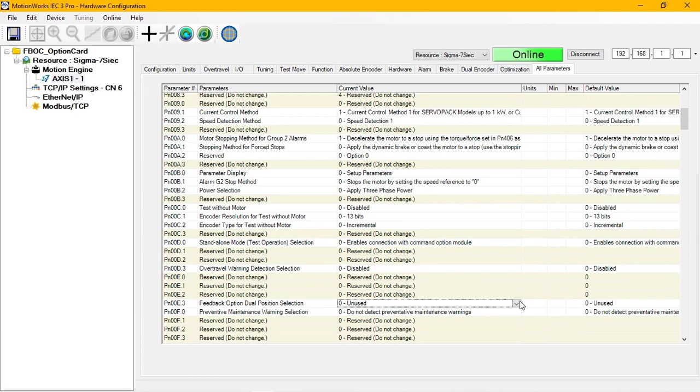Here's a quick preview. The full closed loop and feedback option cards can be added to the Sigma-7Siec for 1.5-axis operation. This operation typically is used for applications that deal with camming and gearing. To enable the external encoder for the 1.5-axis operation, parameter Pn00E.3 needs to be set with the proper rotation direction. When enabled, the external encoder can be used as an electronic gear master. Now let's look at this in a little more detail.

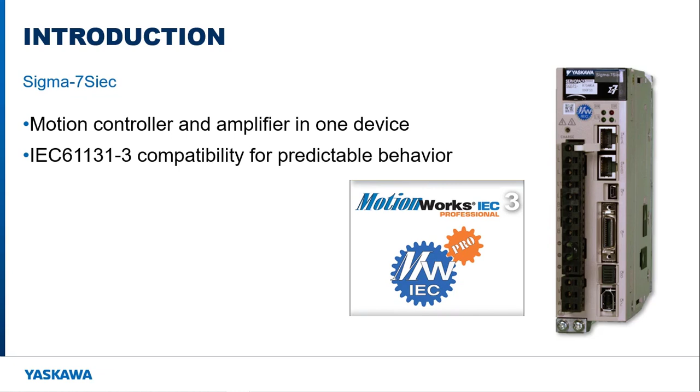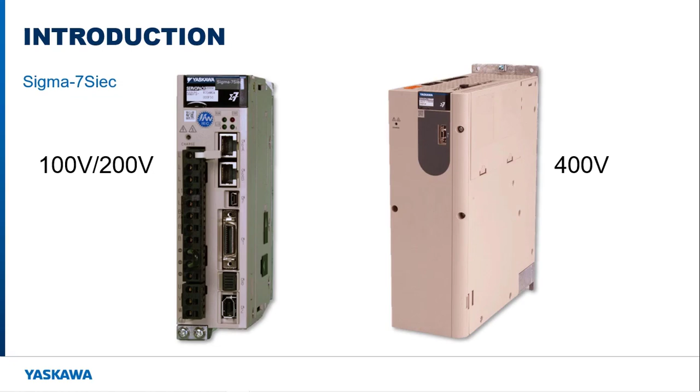Part of the IEC controller lineup is the Sigma-7Siec controller. This Sigma-7Siec controller is a single-axis Sigma-7 amplifier with an embedded controller that allows it to be programmed using MotionWorks IEC. This single-axis controller follows the IEC 61131-3 standard, just like the MP3000 IEC series controllers and the MP2600 IEC 1.5-axis controller. The Sigma-7Siec controller comes in either the 100V/200V style or the 400V style. This single-axis controller has 7 digital inputs and 4 digital outputs available for application use.

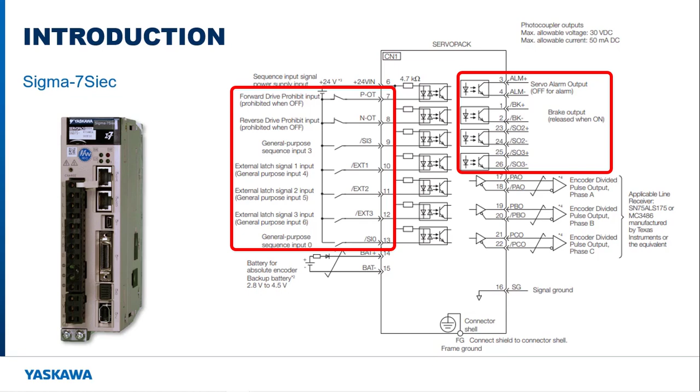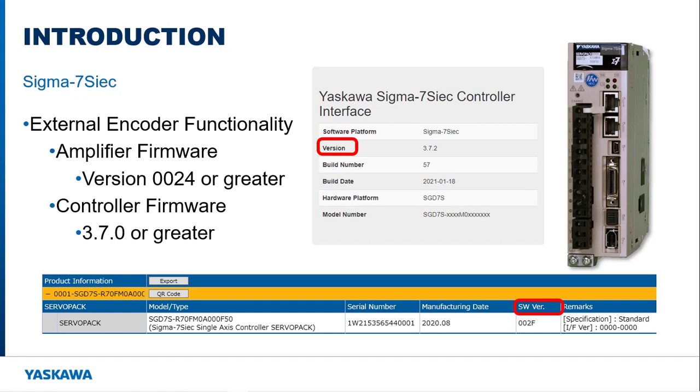Amplifier firmware version 0024 and controller firmware version 3.7.0 adds functionality to the Sigma-7Siec controller. This allows an external encoder to be used to provide 1.5-axis control. 3 option cards are available that can be used for 1.5-axis operation on the Sigma-7Siec controller. The full closed loop option card is one option, and the others are the feedback option cards, which come in 2 variants. These option cards are purchased separate of the Sigma-7Siec, and you as the user install them. They do not come pre-installed from the factory.

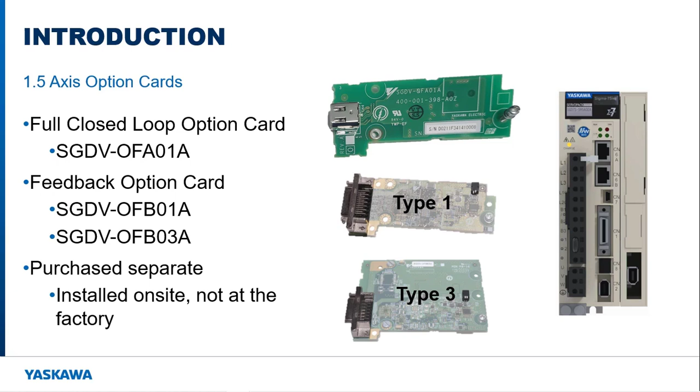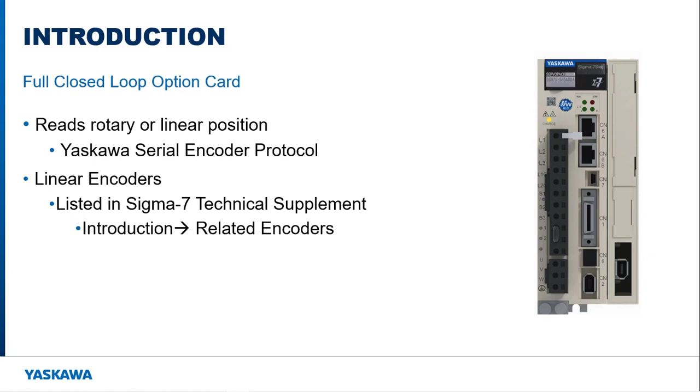Looking at the full closed loop option card, it reads rotary or linear position information from Yaskawa certified encoders. These encoders use the Yaskawa serial protocol to transfer position data. Supported linear encoders can be found in the Sigma-7 technical supplement under the Introduction, Related Encoder section. One rotary encoder is available using the Yaskawa serial communication. The encoder cable used to connect the full closed loop option card with Yaskawa serial encoders can be found in the Sigma-7 technical supplement under the SGMMV and relay encoder cable sections. The option card uses the same encoder connector as the Yaskawa Sigma-7 amplifier.

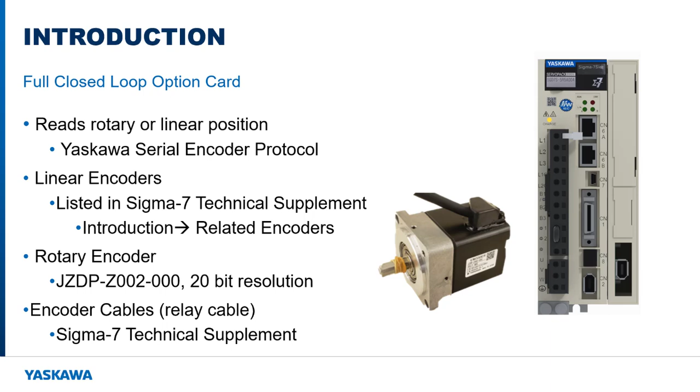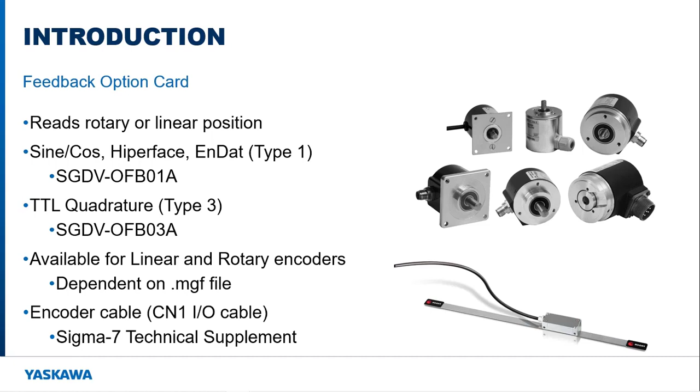The feedback option card is used to read rotary or linear position information from third-party encoders. The Type 1 feedback option card supports the use of sine-cosine, Hiperface, and EnDat encoder protocols. The Type 3 card only supports the use of TTL encoders. To use any third-party encoder with the feedback option card, a manufacturing file needs to be created for that encoder and loaded into the feedback option card. The encoder cable used to connect the feedback option card with the third-party encoder can be found in the Sigma-7 technical supplement under the CN1 I/O peripheral cable section. The feedback option card shares the same connector as the CN1 connector on the amplifier.

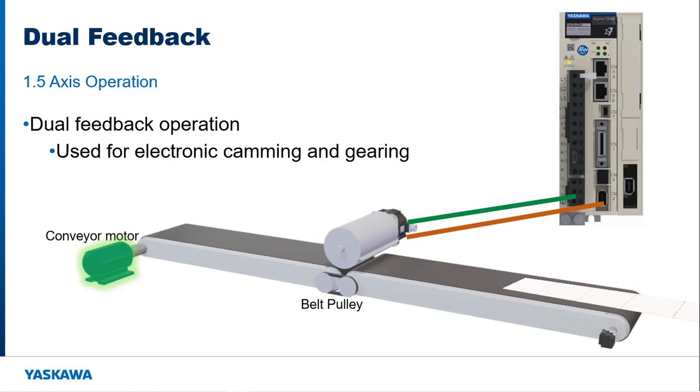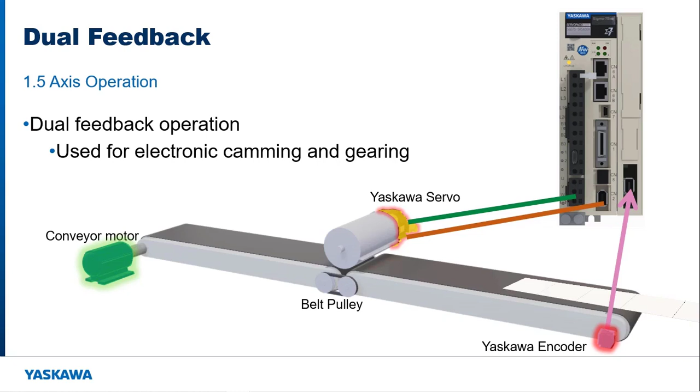The main use of 1.5-axis control is for dual feedback operation. The dual feedback setup uses the external encoder to control the operation of the motor through electronic camming or gearing. Consider the following diagram of a rotary knife mechanism. The conveyor belts are being driven by an induction motor running separately from the Sigma-7Siec controller. The external encoder is the master device, and the Yaskawa servo is the slave device. The external encoder, connected to the Sigma-7Siec via the full closed loop or feedback option cards, reads in the conveyor's position and calculates the speed of the conveyor belt. The servo motor is connected to the rotary knife that is cutting the material riding on the conveyor.

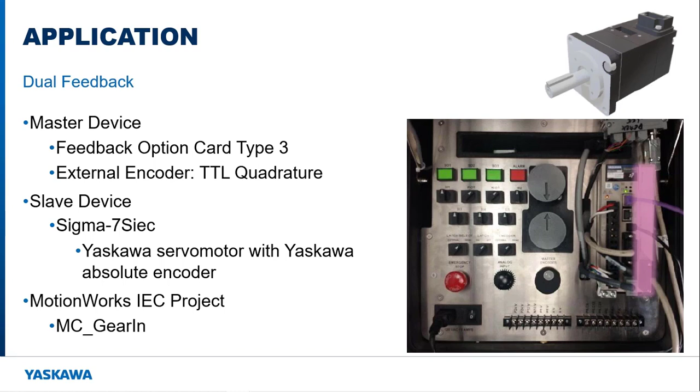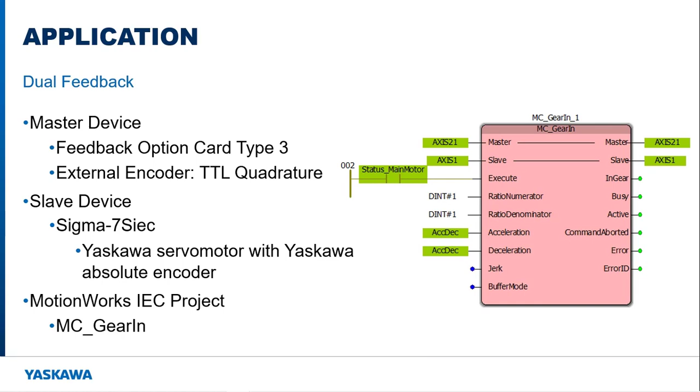I'm going to go through and build a dual feedback application to show how to set up the Sigma-7Siec controller for 1.5-axis operation. For this example, I will be using the Type 3 feedback option card, but the full closed loop and Type 1 feedback option cards can be used in the same way. The master device is going to be a TTL quadrature encoder connected to the Type 3 feedback option card. The slave device will be a Sigma-7 motor connected to the Sigma-7Siec single-axis controller. In the MotionWorks IEC project, the MC_GearIn block will be used to gear the two devices together. The final outcome will show a one-to-one gearing application. One rotation of the master, the external encoder, will equal one rotation of the slave, the servo motor, and both will rotate in the same direction.

These option cards are ordered separately from the Sigma-7Siec controller and need to be installed on the Sigma-7Siec. The option card installation guide is available on Yaskawa's website, along with the product manual for the feedback option card. The general installation guide is also included in the option card box when ordered.

After the option card is installed, the servo pack can be powered up and initial settings can be performed in MotionWorks IEC. I am online in hardware configuration with a new project, and the controller is currently set back to its default configuration. The hardware tree displays the integrated servo axis.

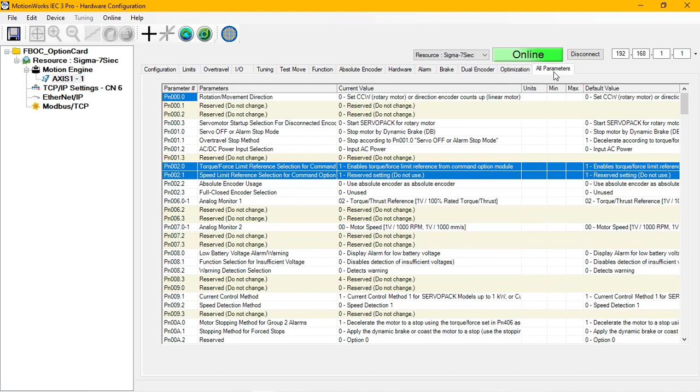To enable the dual feedback external encoder functionality on the feedback option card, I need to go under Axis 1, go to All Parameters, and parameter Pn002.3 needs to be set to either 1 or 3. When turning on the use of the dual feedback encoder, the positive direction needs to be specified for the encoder. For this example, the encoder rotation should be the same as the motor rotation.

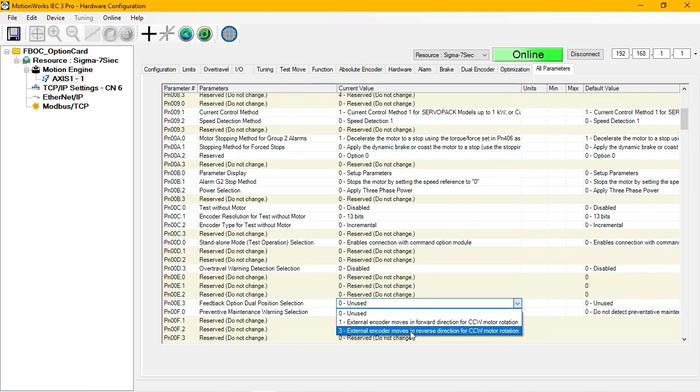If I look at Axis 1 again, and go to parameter Pn000.0, I can see that the motor's rotation is set to counterclockwise for the positive direction. So if I go back to all parameters, through testing I have found that setting 3 gives me the desired result for the encoder rotation. I can now do an online save and reboot.

After reconnecting in hardware config, Axis 21 will now be available in the hardware window. This is the external encoder that is connected to the feedback option card. Looking under the resource, I can see that there is an alarm, and it is an A.CF1 alarm. If the full closed loop option card was used, the alarm would not appear. This alarm is there because there is no manufacturing file in the Type 3 feedback option card. This file needs to be loaded using SigmaWin+ version 7. Loading the manufacturing file can be done after hardware configuration has been set up.

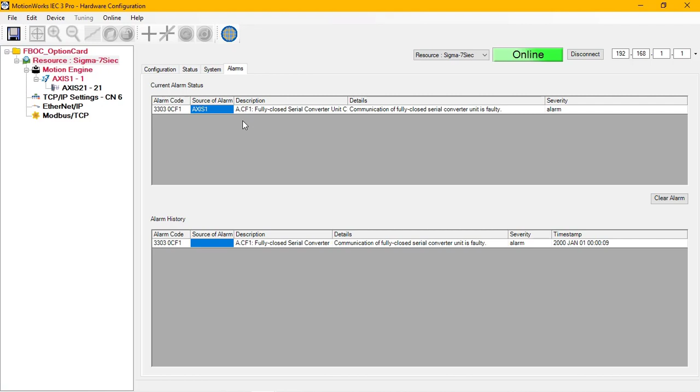Going back to the external encoder axis, the encoder being used is a TTL, otherwise known as an A quad B rotary encoder. The encoder spec sheet shows that the encoder is 13-bit, so the resolution in hardware configuration should be set to 2 to the 13th, which is 8192. The feed constant needs to be set equal to the motor encoder's feed constant so that visually, one rotation of the external encoder will rotate the servo motor one rotation.

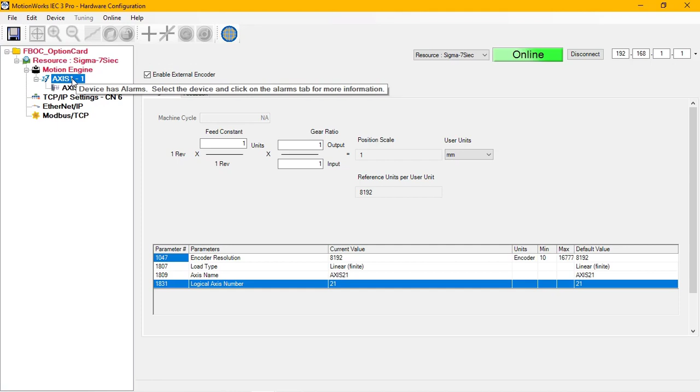So if I go under Axis 1, I'll see that the feed constant is set to 360 and the user units is degrees. So I'm going to go back to the external encoder and I'm going to set the feed constant to 360, and set the user units to degrees. Another online save and reboot can be performed.

The full closed loop option card does not require a manufacturing file, but for this example I'm using the feedback option card, so a manufacturing file needs to be loaded using SigmaWin+ version 7. Contact your local RME to work with you to create the manufacturing file, otherwise known as a .mgf file. This file is specific to the encoder that is being used. The encoder resolution needs to be provided to the RME along with the encoder type for the Type 3 feedback card, so they can create the manufacturing file.

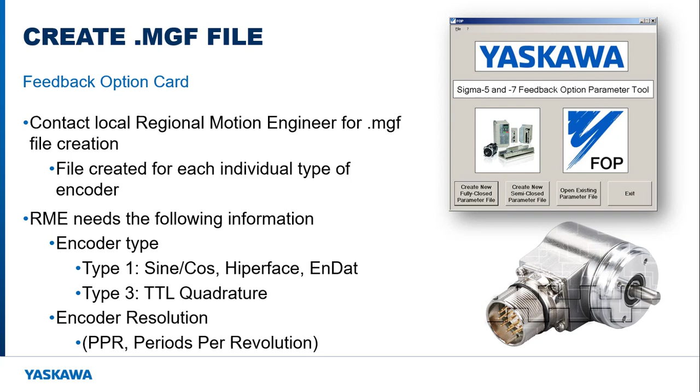Open SigmaWin+ version 7 and connect to the amplifier using the USB connection. For this example, I am using SigmaWin+ version 7.32. Looking at the product information inside SigmaWin+, I can see that there is no feedback option module information for the encoder. That is empty, so that is why a file needs to be loaded.

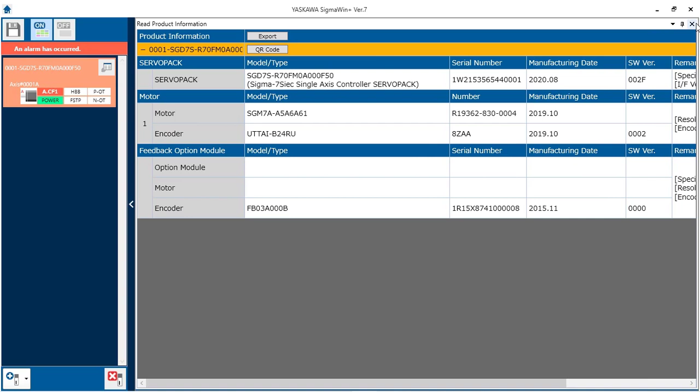To load a .mgf file, go under Main Menu, go under Encoder Settings, go to Motor Parameter Scale Write. A message will appear basically saying that it's going to be rewriting the scale file, so if there's any wrong information, it could cause issues in the motor's operation. I'm going to hit OK.

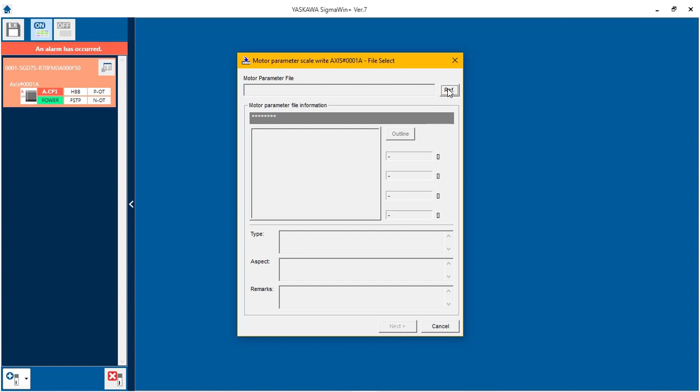To load the actual manufacturing file, I'm going to hit Reference, select the file I want to load. Then I'm going to hit Next to go on to the screen that allows me to actually write it to the amplifier. Now down here, this is all the information that is included in the file. So there's a picture, and the type of encoder being used, and then some remarks for the encoder. So I'm going to hit Write.

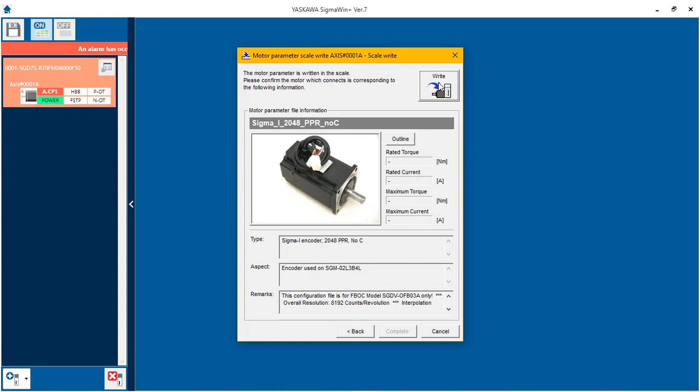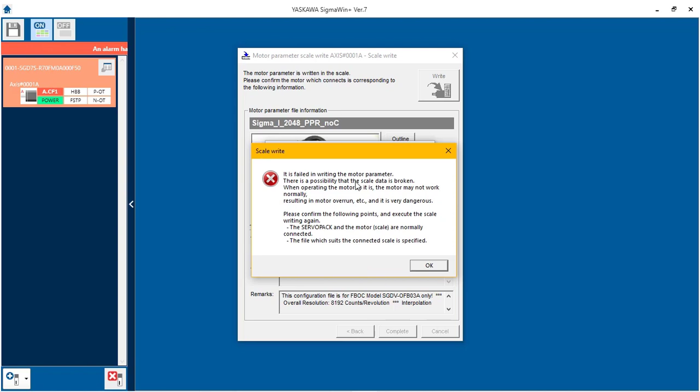Another message appears basically saying, are you sure you want to write this information? I'm going to hit Yes. SigmaWin+ version 7 is going to then basically say that it can't write the file, even though it actually did write the file. So for right now, I'm going to select the function as ended without executing writing. Now the message is going to appear saying that it's not written, even though it is. I'm going to hit OK. And then a hard reboot can be performed.

To verify that the encoder file was written, you can go back into the main menu, go under Product Information, and now under the Feedback Option module, you can see the information has been placed there for the external encoder.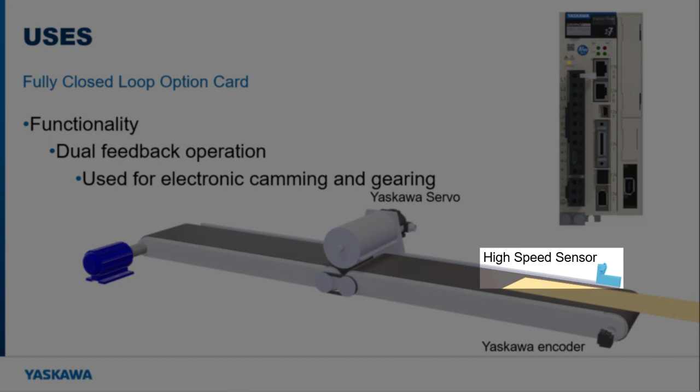High-speed sensors are used in these types of applications for taking position information of registration marks. Referring back to the rotary knife diagram, let's say that a sensor is added before the knife. This sensor is used to capture registration marks on the material so the knife's position can be adjusted for the cut. This sensor comes into the CN1 connector on the Sigma-7Siec controller.

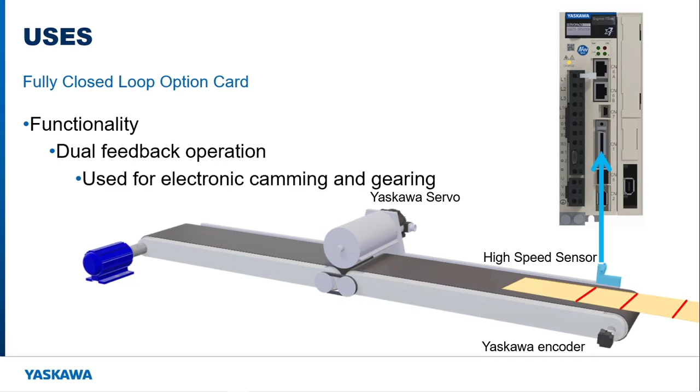Looking at the Sigma-7Siec I/O diagram in the product manual, it has 3 digital inputs that have high-speed latch characteristics. These inputs can be used to capture the sensor signal. For this example, I will use EXT1 as the external latch trigger input, which is pin 10 on the CN1 connector.

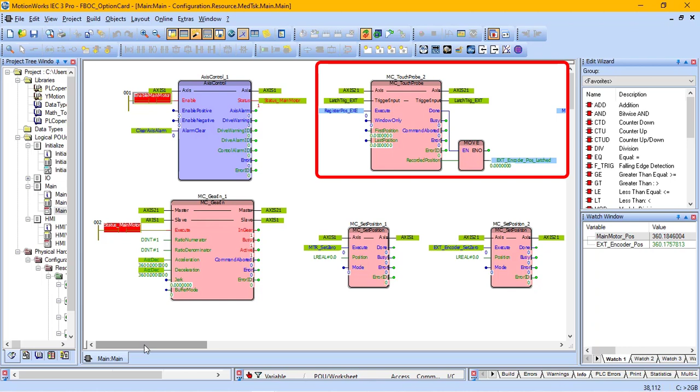To show that the Sigma-7Siec controller can capture the external encoder position using a high-speed latch, I will use the MC_TouchProbe function block in the MotionWorks IEC program. A toggle switch connected to pin 10 on the CN1 connector will latch the encoder position.

Executing the MC_TouchProbe function block, I can rotate the external encoder and toggle the EXT1 input to capture the external encoder's position. The captured position can be seen in the main window of MotionWorks IEC.

One important note is that the Sigma-7Siec controller can only have one MC_TouchProbe executing at a time. Multiple MC_TouchProbes can be used to latch encoder positions as long as they are not active at the same time.

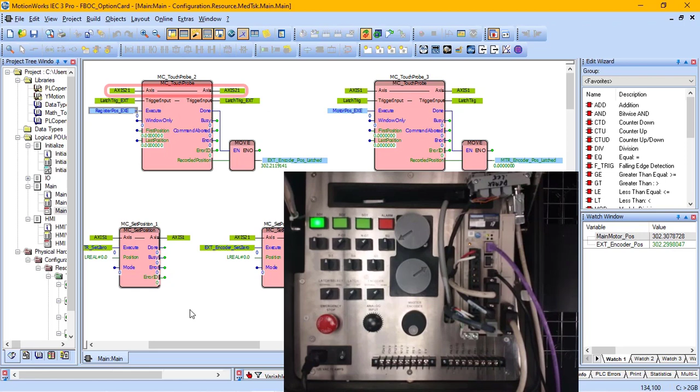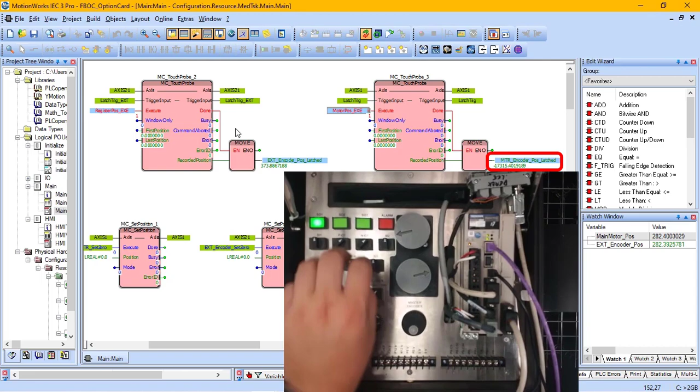For example, in the one-to-one gearing application, both the external and servo motor encoders can latch positions. For this to occur, one touch probe has to be executed, and then I can rotate the encoder, and then latch that position. Then I can go over to the second touch probe, execute it, rotate the motor again, and then latch that position. Simultaneous triggers are not supported on the Sigma-7Siec.